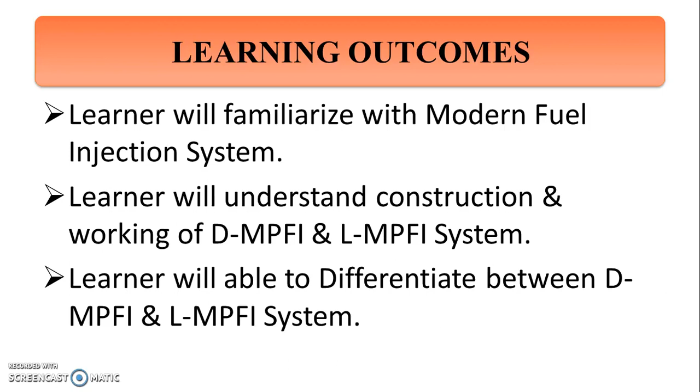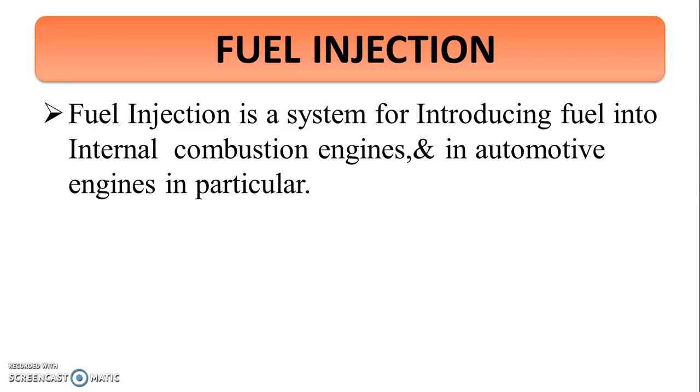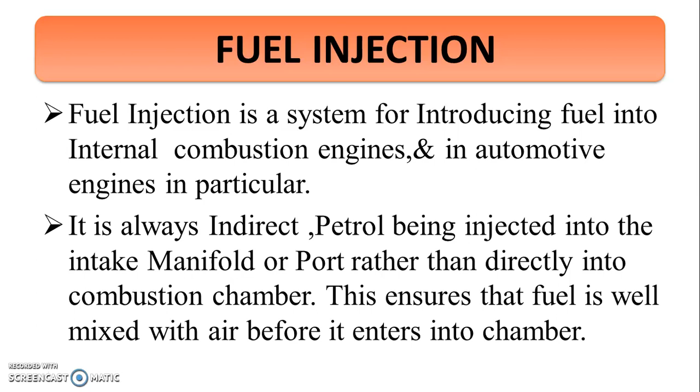Fuel injection introduction. Fuel injection is a system for introducing fuel into internal combustion engines, and in automotive engines in particular, it is always indirect, petrol being injected into the intake manifold or port rather than directly into the combustion chamber. This ensures that fuel is well mixed with air before it enters the chamber.

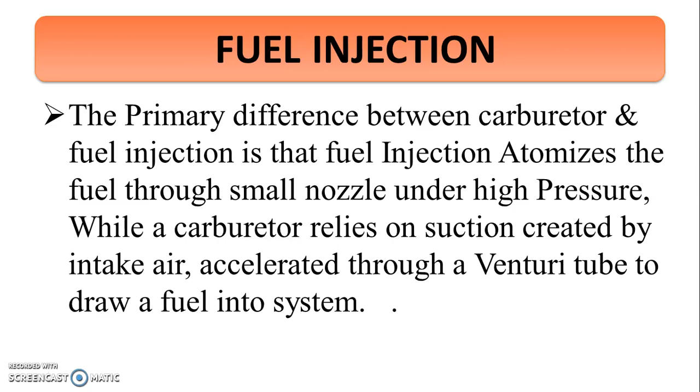The primary difference between carburetor and fuel injection is that fuel injection atomizes the fuel through a small nozzle under high pressure, whereas a carburetor relies on suction created by intake air accelerated through a venturi tube to draw fuel into the system.

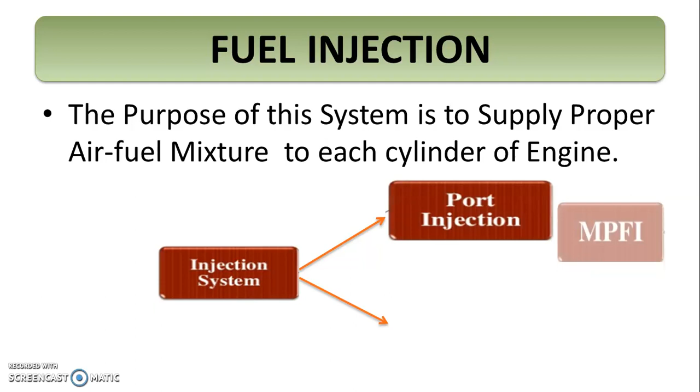The purpose of this system is to supply proper air-fuel mixture to each cylinder of the engine. This injection system mainly has two types: the port injection, that is MPFI, and the throttle injection. Dear students, we will discuss these systems in detail.

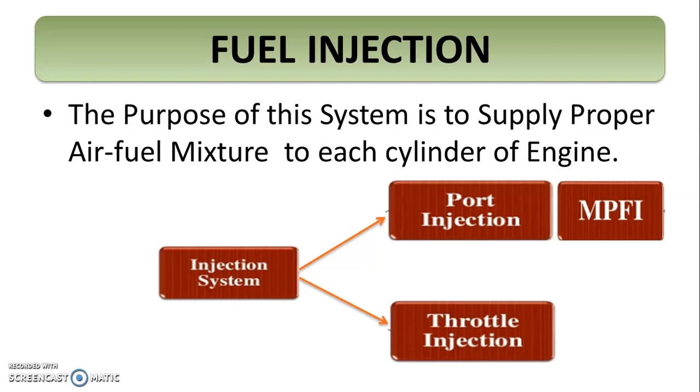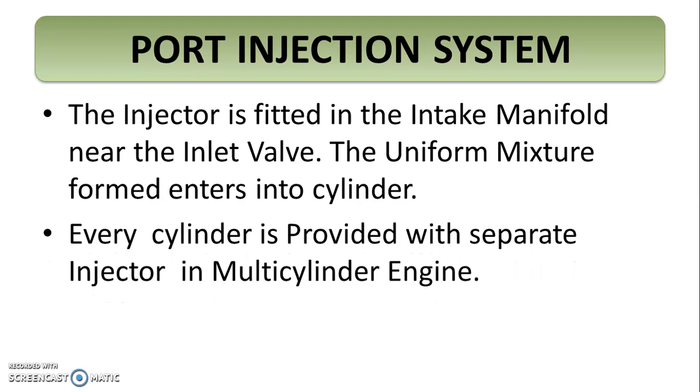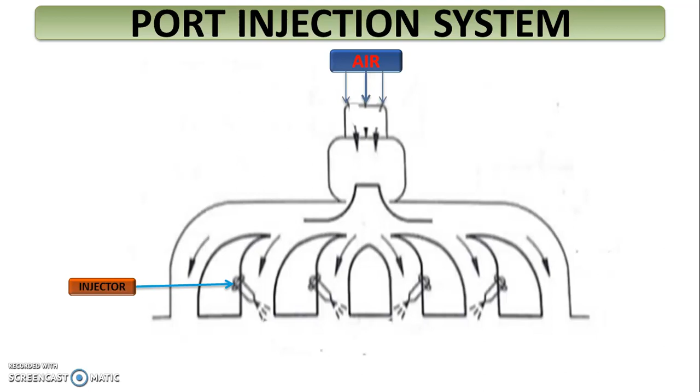Port injection system. In port injection system, the injector is fitted in the intake manifold near the inlet valve, and a uniform mixture enters into the cylinder. Every cylinder is provided with a separate fuel injector in a multi-cylinder engine. The figure shows the port injection system in which the number of fuel injectors is equal to the number of cylinders present.

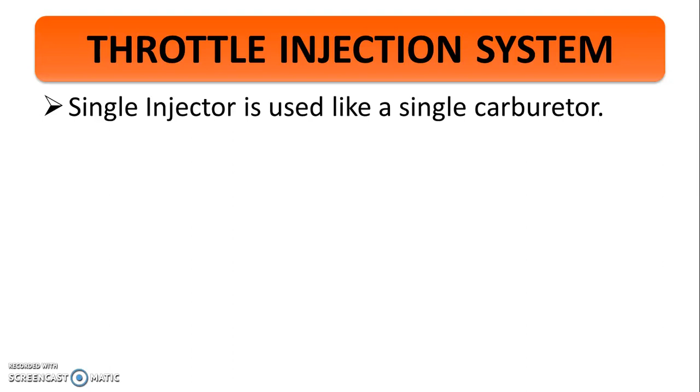Next, the throttle body injection system. In throttle body injection system, a single injector is used like a single carburetor. The throttle valve controls the amount of air entering into the intake manifold. The injector is placed above the throat of the body, and the injected fuel mixes with air. This mixture then passes into the intake manifold, and the fuel injected is controlled as per the speed and load on the engine.

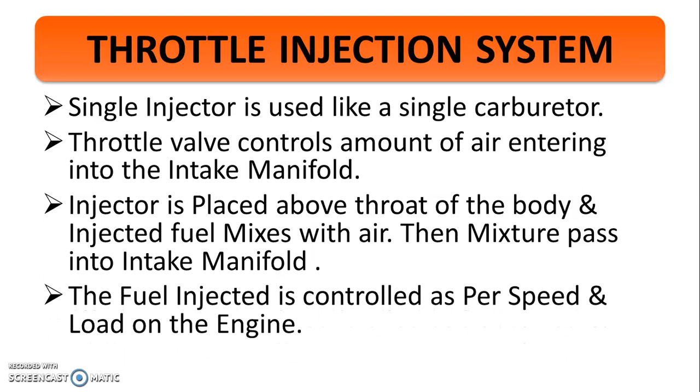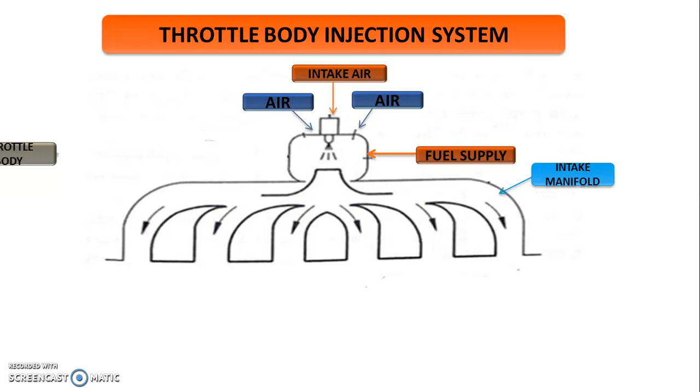This figure shows the throttle body injection system in which the fuel is supplied, and then the air fuel mixture enters into the intake manifold. At the throttle body, the injector is present.

Then we will study the DMPFI system. D stands for Druck, a German word, which is called as pressure. In DMPFI system, the pressure sensor in the intake manifold detects the intake manifold vacuum and sends the signal to the ECU, that is electronic control unit. The speed sensor is also present.

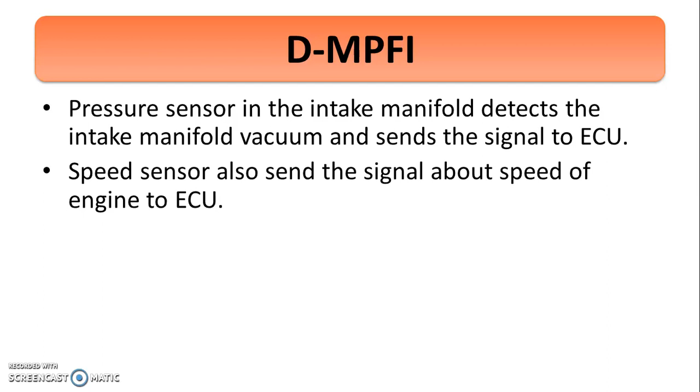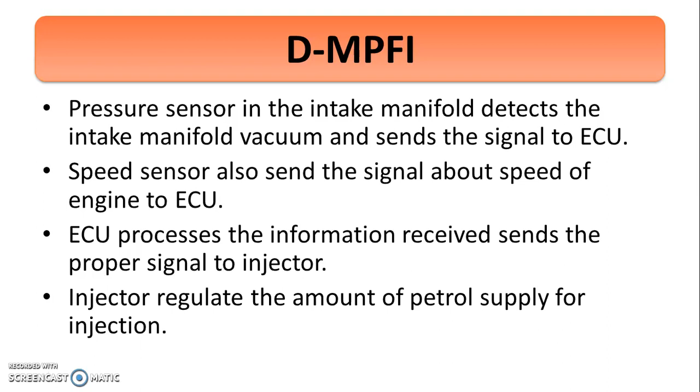That speed sensor sends the signal about the speed of the engine to the ECU. The ECU processes the information received and sends the proper signal to the injector, which will regulate the amount of petrol supply for the injection. After injection, that petrol mixes with the air in the intake manifold, and that mixture enters into the cylinder.

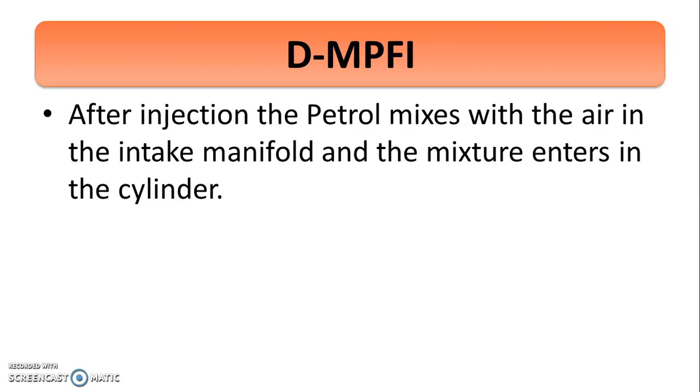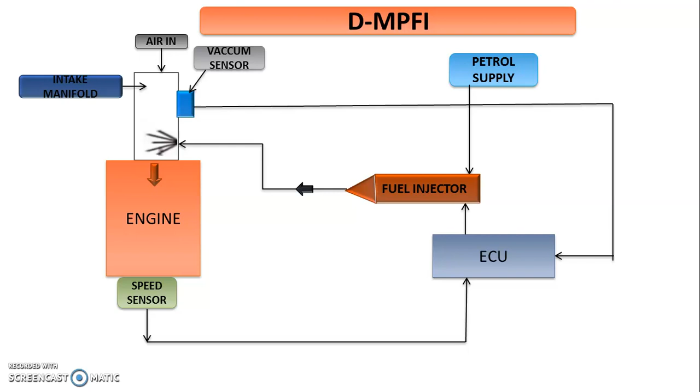So here is the block diagram for the DMPFI system: the vacuum sensor sends signal to the ECU, and the speed sensor also gives information about the speed of the engine to the ECU. According to that, the fuel injector will supply petrol into the intake manifold, and whatever air comes into the intake manifold mixes with the fuel, and that air fuel mixture enters into the engine. So this is the DMPFI system.

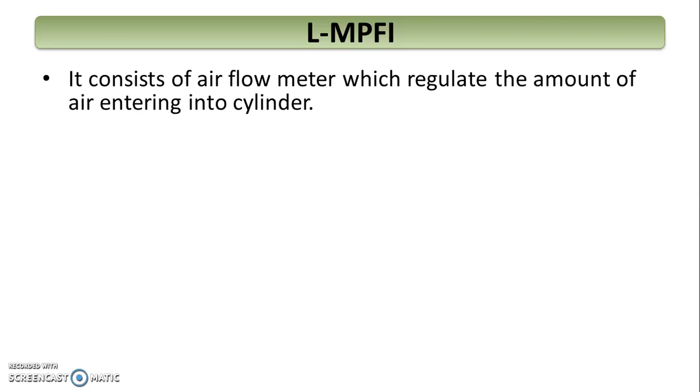Next, LMPFI system. L stands for Luft, meaning the mass of air. In LMPFI system, it consists of an airflow meter which regulates the amount of air entering into the cylinder. This airflow sensor measures the amount of air entering the intake manifold and sends the signal to the ECU.

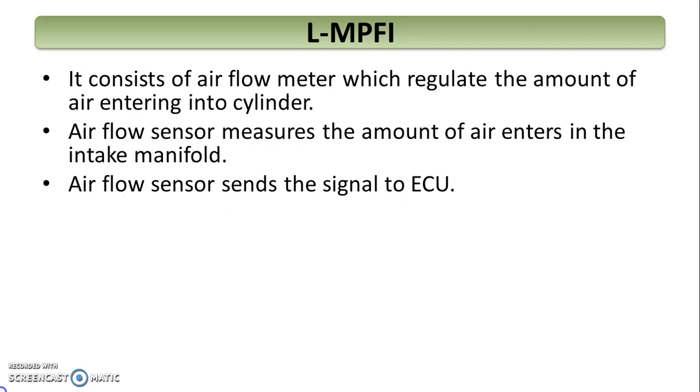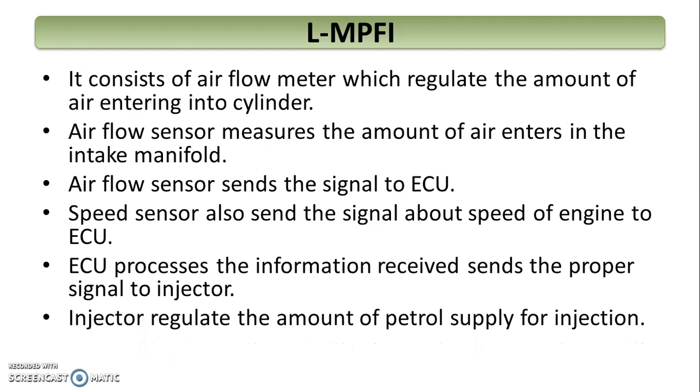Also, a speed sensor is present, which sends information about the speed of the engine to the ECU. The ECU processes the information received and sends the proper signal to the injector, which regulates the amount of petrol supply for the injection. After injection, the petrol mixes with the air in the intake manifold and the mixture enters the cylinder.

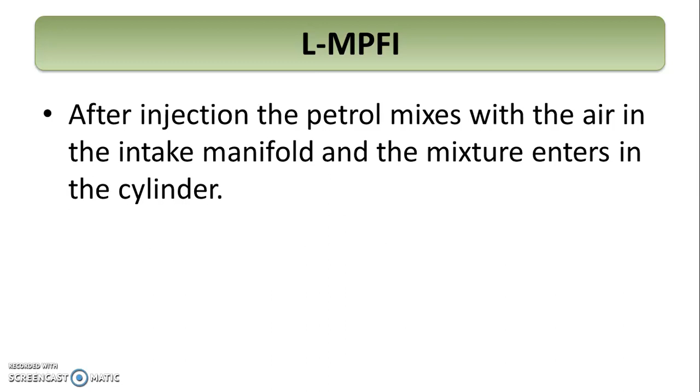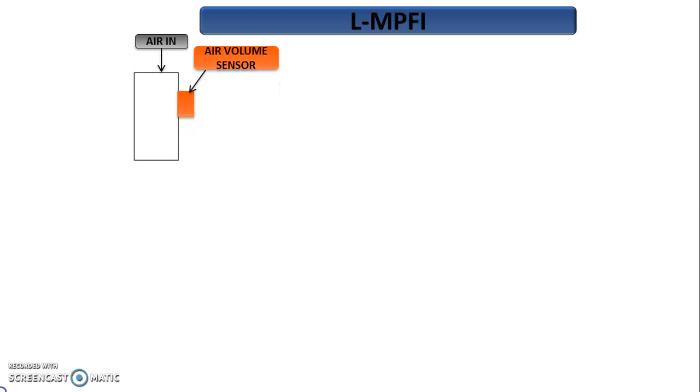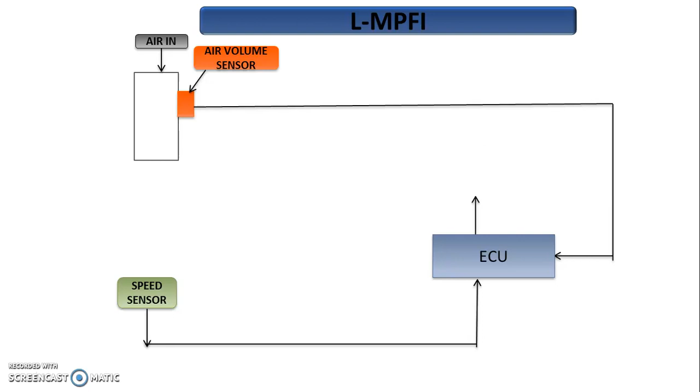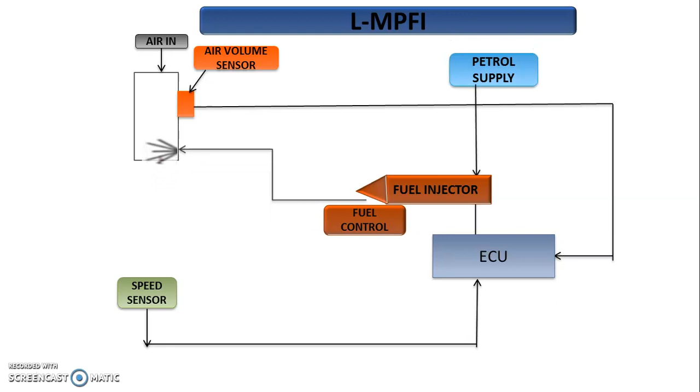This figure shows the block diagram for the LMPFI system, in which the air volume sensor gives information to the ECU about the quantity of air. Similarly, the speed sensor also gives information to the ECU about the speed of the engine. According to the information received by these sensors, the ECU processes and gives a signal to the fuel injector to control the fuel, which will supply fuel according to the quantity of air and the speed of the engine.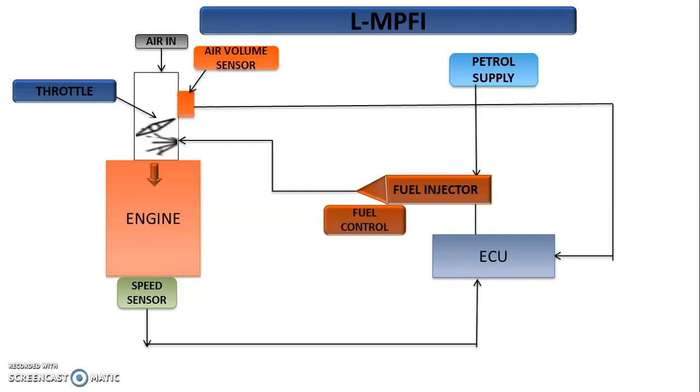The throttle valve controls the amount of air entering into the cylinder. In this way, through the intake manifold, the air fuel mixture enters into the engine.

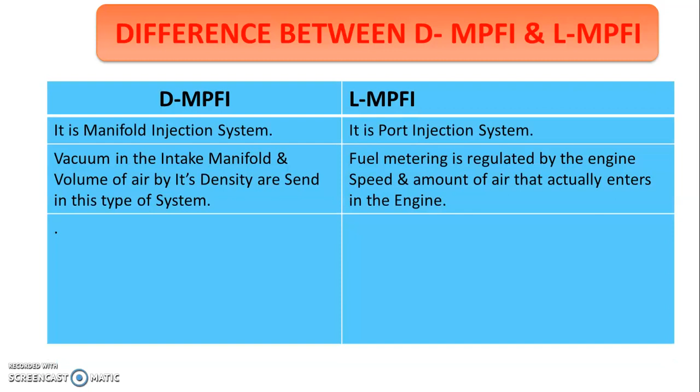Dear students, now we will discuss the difference between DMPFI and LMPFI system. DMPFI is a manifold injection system, whereas LMPFI is the port injection system. In DMPFI system, the vacuum in the intake manifold and volume of air by its density are sensed. In LMPFI system, fuel metering is regulated by the engine speed and the amount of air that actually enters into the engine.

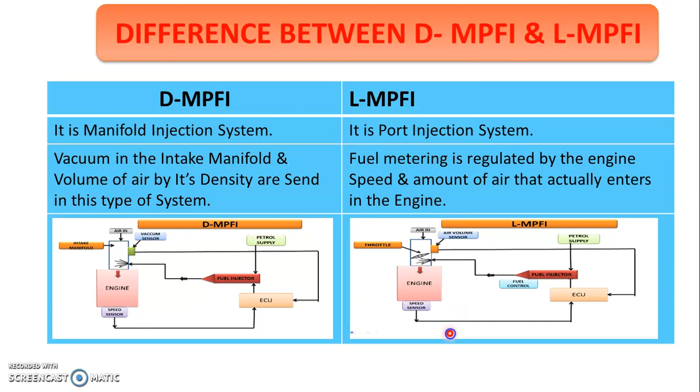Here it shows the block diagram for the DMPFI system, and this is the representation of the block diagram for LMPFI system. In DMPFI system, as air enters into the intake manifold, the manifold pressure sensor detects the intake manifold vacuum and sends the information to the ECU. In LMPFI system, as air enters into the intake manifold, the airflow sensor measures the amount of air and sends the information to the ECU.

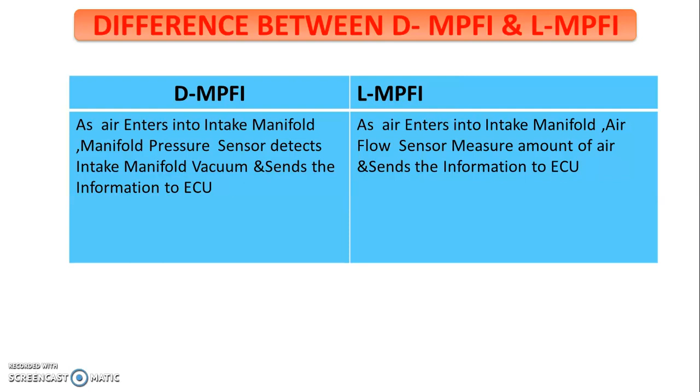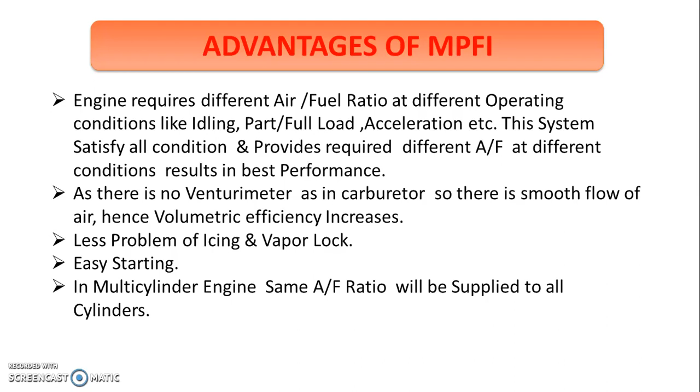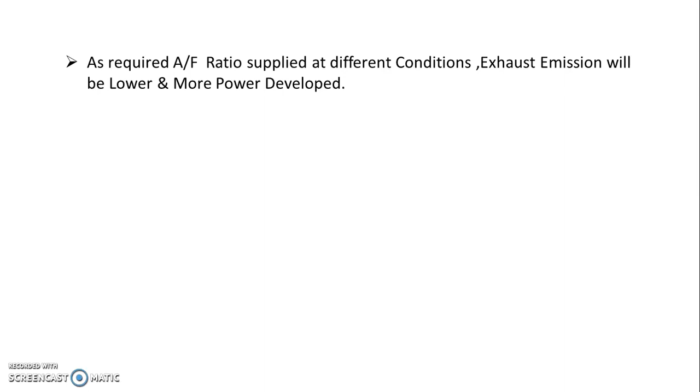Low problem of icing and vapor lock, and easy starting. In a multi-cylinder engine, air-fuel ratio will be supplied to all the cylinders in the same quantity. Also, as the required air-fuel ratio is supplied at different conditions, the exhaust emission will be lower and more power is developed. Improved BSFC, that is brake specific fuel consumption, results in better mileage of an automobile.

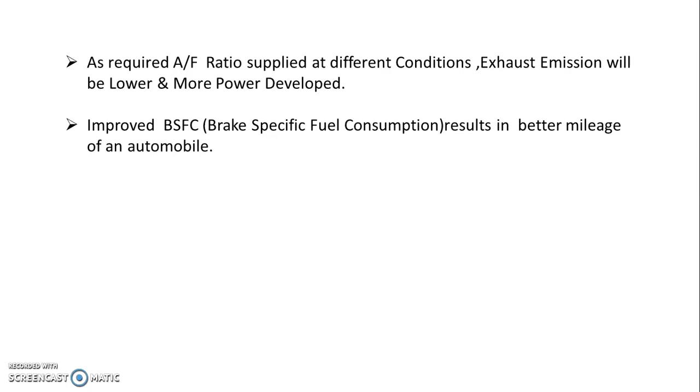Dear students, in this way we have learned the fuel injection system in this video. The questions on this fuel injection system: differentiate between DMPFI and LMPFI system, explain DMPFI system with neat sketch, describe the LMPFI system with neat sketch. I hope all of you are now able to solve these questions.